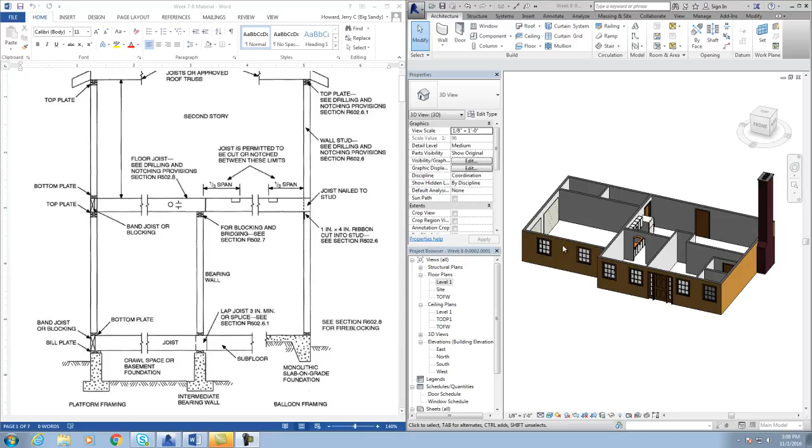Welcome back to this next lesson. As you can see on the right side of my screen, I have exactly what you have right now, and you've probably got a lot more. I don't have all the windows in mine, but I've basically got the doors, a few windows, and you should have yours completed. I've also got my kitchen set up - cabinets, appliances, refrigerator, all that good stuff is in there.

After I get my first floor set up, I'm going to start designing my foundation. That's always the first step as a designer in architecture - you always start out with your first floor. The reason being is that way you know exactly what needs to be supported to build your foundation.

So what I want to do first is tell you how we're going to build the foundation of this, and how we're going to construct it - what type of method are we going to use. There are a couple methods out there. We're going to use a platform frame construction on this.

And what that means is basically, right here's your platform - this is going to be your floor joist. It makes a platform, and on top of that is where you build your walls. This is going to be your stud walls, set exactly on top of that platform. The platform sits on the sill plate, which sits on the foundation wall, and then the footer is what supports that. So that's what we're going to use to build this one.

And if you look on your blackboard, it says that we want to build a foundation wall that's 32 inches. So we're going to take off and start doing that, and we're going to add levels to this.

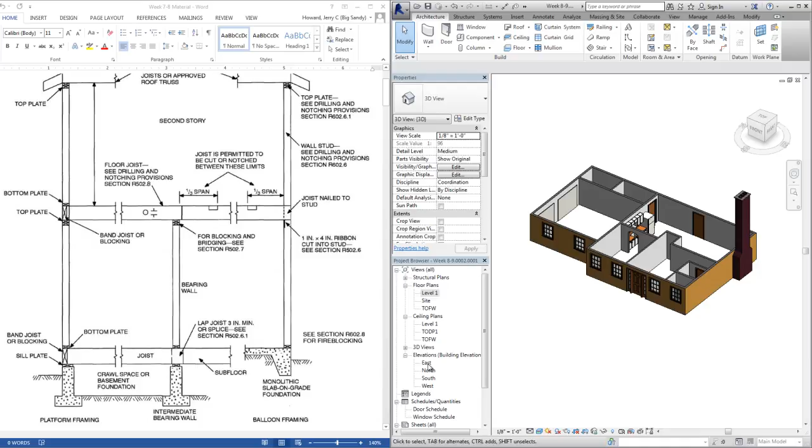To do so, I come down here in my project browser and I'm just going to go to my east elevation. Or let's go to the south elevation, we'll probably see it a little better.

I've already got a couple things up here - you see that? I'll pull these over so we'll have enough room to be able to see it a little easier. I've got my top of double plate 1, and your double plate is this right here, you see that? Top of double plate, that's that line right there. I've got it at 8 foot 1 1/2 inch.

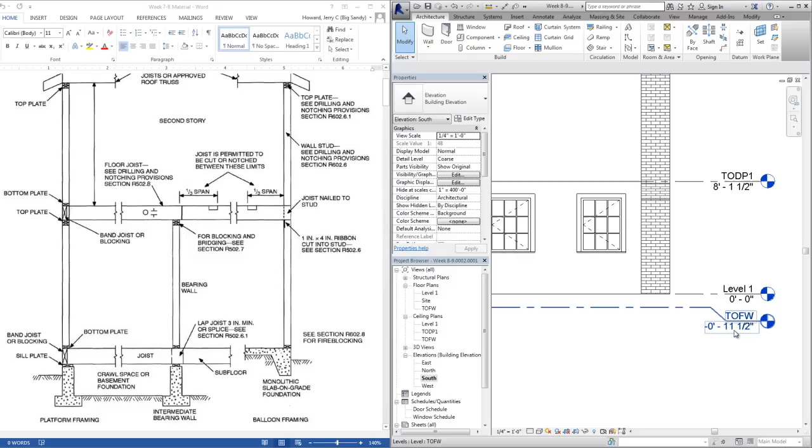Alright, level 1, this is the level I'm walking on in the house on the first floor, is at 0. And if you look here, my top of foundation wall is negative 11.5, so it's 11.5 down this way. The top of foundation wall - if you follow my cursor over here, you see this? Right underneath that sill plate is your top of foundation wall.

How I come up with 11.5 is because we want to use 2x10s on this floor for the floor joist. So if you scoot down through here - 2x10s, the nominal size says 2x10, but the actual size is 1.5 by 9 1/4. And this is the size that you draw to - you never draw a nominal size, you always draw what it actually is.

So 9 1/4, you can add that up, 9 1/4, and then we're going to put 3/4 inch tongue and groove plywood, or you can put AdvanTech on there, whichever way you want to do it. It's about 3/4 of an inch. So 9 1/4 plus 3/4 is 10 inches.

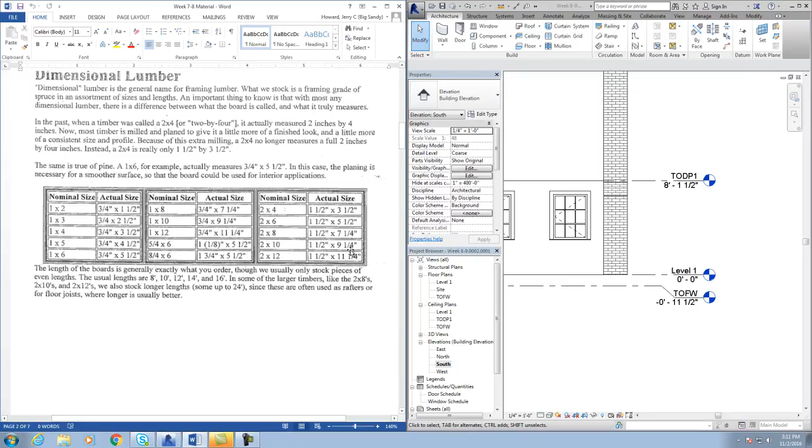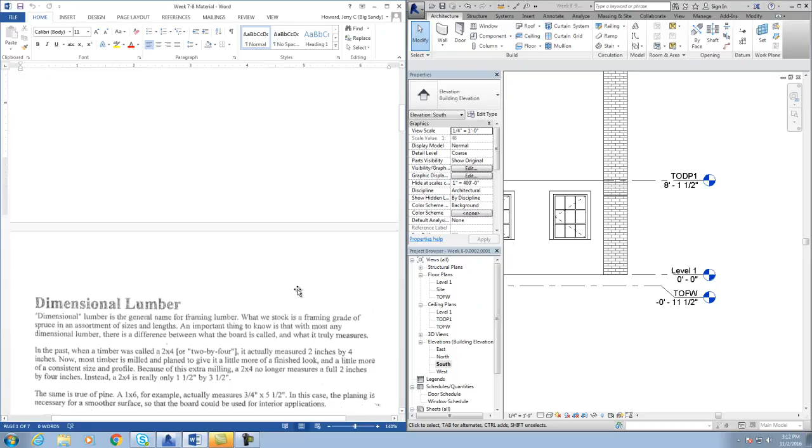And then don't forget one more thing - if right up here is your 0 mark, right across the top of this floor, this is 9 1/4, and then plus you've got to add in that 3/4 inch flooring, makes 10 inches to there. And then the sill plate is a 2x6. So a 2x6, if you come down through here, is 1.5 thick. So that's where you take 10 plus 1.5, makes 11.5, and you've got the top of your foundation wall.

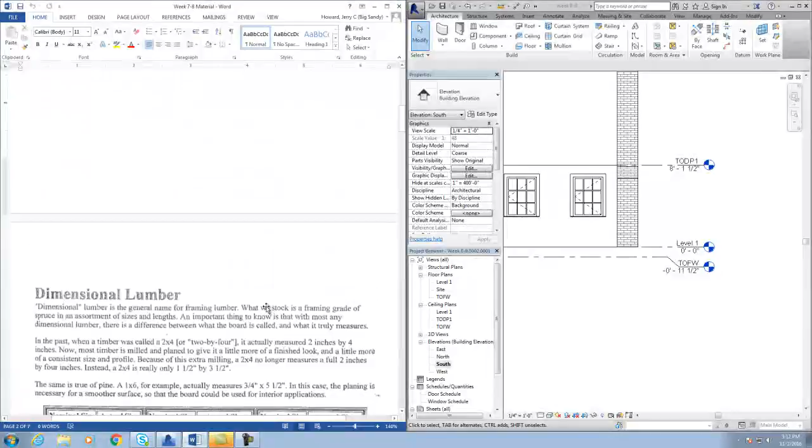Now you also saw that I had on our blackboard that we want to make the foundation wall - we want to make that foundation wall right here - 32 inches. This is how you do it. In architecture, over here is your datums, right here, level. I'm just going to roughly put me a line over here and click.

Escape to get out of the command. I'm going to double click there, and I'm going to call this one TOF, capitalize that, top of footer. Yes, I want everything to correspond with it.

And that's right here, it'd be at this level right here. That'd be my top of footer, this will be my bottom of footer. But before we get too carried away,

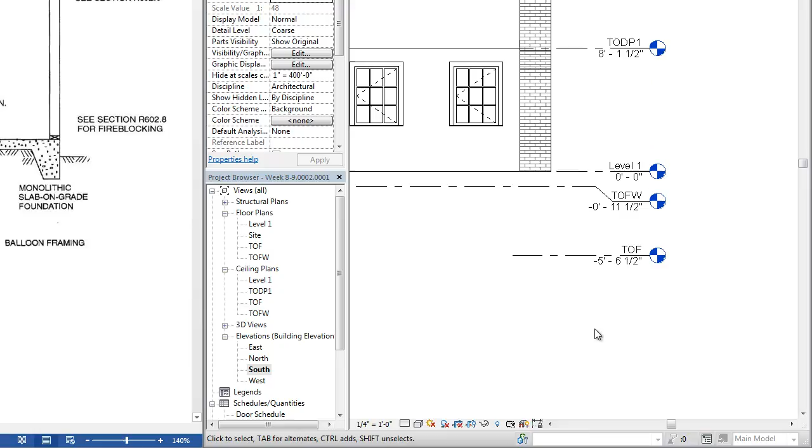I need to set this dimension. This is going to be 32 inches, and it puts it just like that.

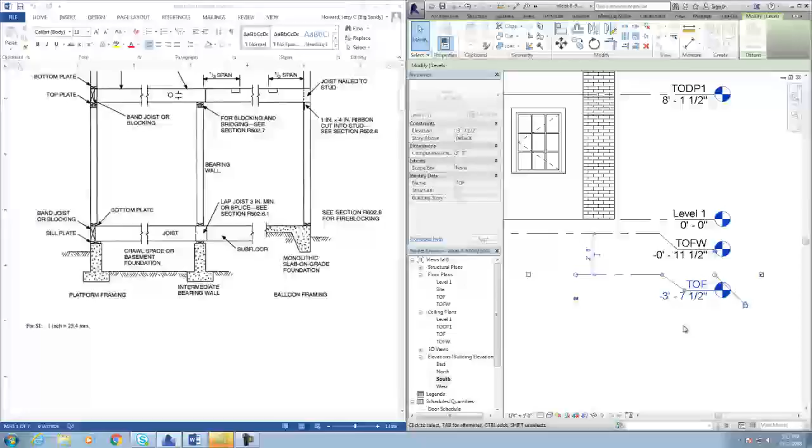Now, if you get crowded in here, and I've got this one set at 1/4 inch equals 1 foot, you can just click that and change it to whatever you want to. But if it gets too crowded, you can click on this and hit your squiggly line, and then you can pull, and you can kind of clean up a little bit, okay?

And then you can shoot that line on across there if you so choose to.

Catching that dimension. Click on it and you'll get a grip just like that one, and you can be able to pull that right on across.

I can already get it for that number. There it is. And then you can pull it on across.

Okay. The next thing I want to do is make a bottom of footer, but I really don't know what size my footer should be or anything of the sort. So I'm going to show you what is the minimum way to find out what your foundation wall should be, the thickness of your foundation wall, as well as the width and depth of your footer. And this is just a minimum method.

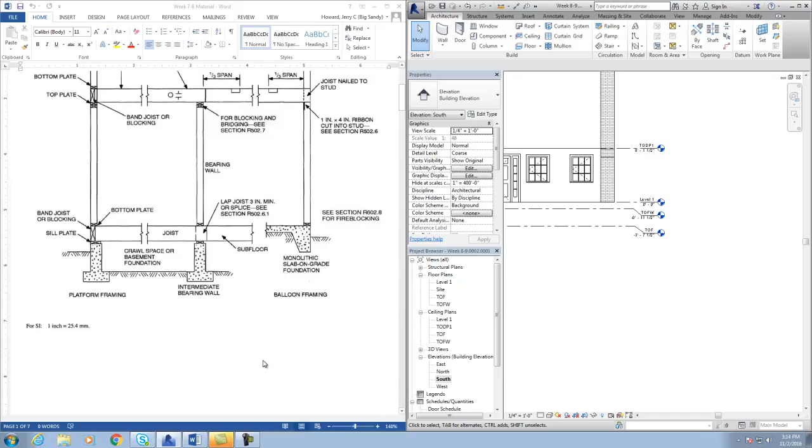And if we'll go over here to this side, I want to slide down here, and again, this is your foundation wall. We're going to find the width of it, the width of the footer, the T foundation, and then we're going to find the height of it. And I want to slide right down here, and there's a chart.

And here it is, and you've got 3 different categories. You got maximum wall height, you got maximum unbalanced backfill height, and then you got soil classifications, and you got 3 of those. Now, we're going to start out with

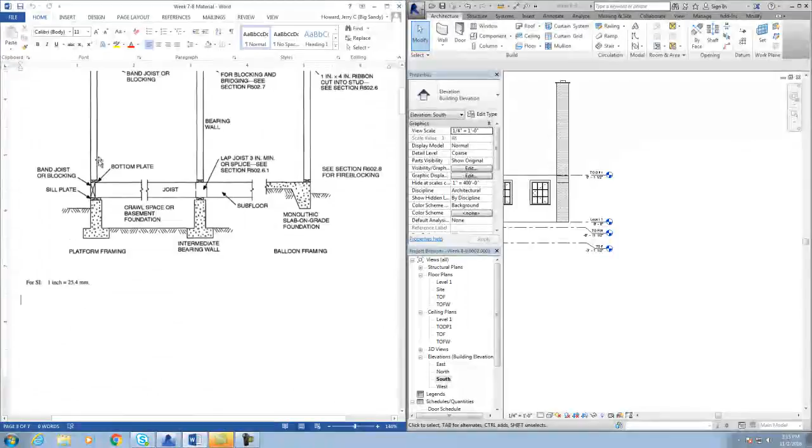maximum wall height. And this is just basically how tall this foundation wall is from the top of the footer up to the top of the foundation wall where it touches the sill plate. Okay?

The next thing you're going to look at is maximum unbalanced backfill height. Now, what that means is unbalanced. Well, if you look at this, you see how the earth, this right here is your grade line, and this is all earth over here.

So this footer was dug down to get below the freeze depth, the frost depth, and if you look right here, this is all dirt, and this is going to be crawl space and going to be opened. Okay? So they call that unbalanced when you've got dirt on this side of it and this side doesn't have any dirt. That's what they mean by unbalanced.

So let's say, for instance, this wall right here is 6 foot tall. We'll just throw that out there, and we know it don't look proportional, but let's say it's 6 foot tall, and we've got dirt unbalanced on 5 foot of it. Okay? Just for an example. So it's 6 foot tall, and you got 5 foot of dirt on that wall, unbalanced.

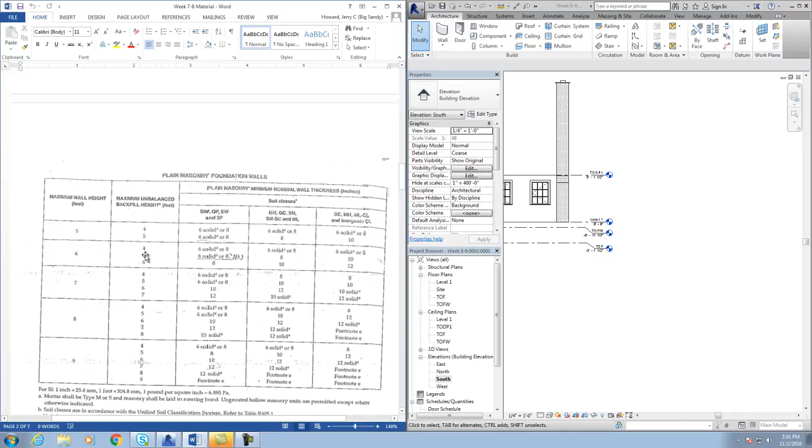So you slide down here, you find the wall was 6 foot, and you had a 5 foot unbalance of dirt on one side. Now you got to figure out, now remember that, now you got to figure out what kind of soil that

you have, and that would have to be taken to a civil engineering firm, and they would take and test your soil for you, and they would tell you exactly what kind of soil it was. And these different ones here, they're in 3 different categories or columns. We'll slide down here and I'll show you what they look like.

Here, this is how you do soil classifications. You got the first letter and a second letter. The first letter is like G for gravel, S for sand, M for silt, C for clay, O for organic. And then the second letter is P, W, H, and L. It's poorly graded, well graded, high plasticity, or low plasticity.

Now, this chart, what I'm showing you over here, I've got it attached in Blackboard for you, so you'll have that. But let's say, for instance,

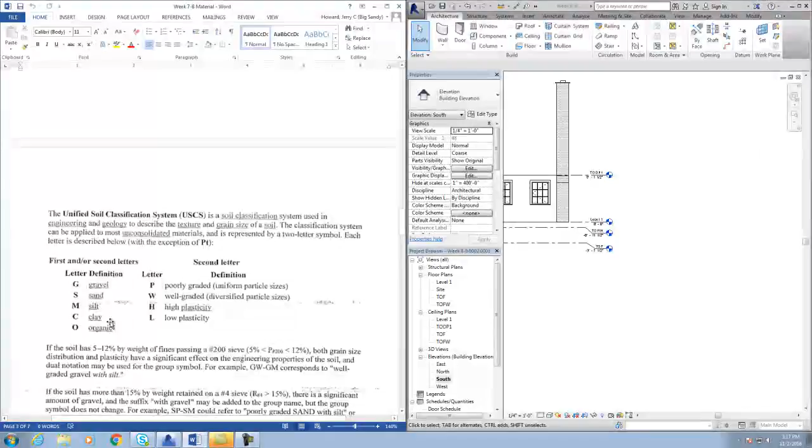I've got let's say an SW soil, okay, and we've got that 6 foot wall, 5 foot unbalanced. So in this column, we come down, and it's telling me that my foundation wall should be 6-inch solid concrete or an 8-inch CMU, which is a concrete masonry unit.

You can use either one. Now also, it's got a little tag on it, if you can see that - it's got a D on it, and there's a little drop-down footnote. It says here: solid grouted hollow units or solid masonry units. So you can either pour that with concrete solid 6-inch foundation wall, or you can take a 6-inch concrete masonry unit and pour it with grout, and it would be the same thing.

You can use that. So we decide, and another thing is, after you figure this out, say like this 8-inch, where you're going to use the 8-inch CMU is what I would use on this.

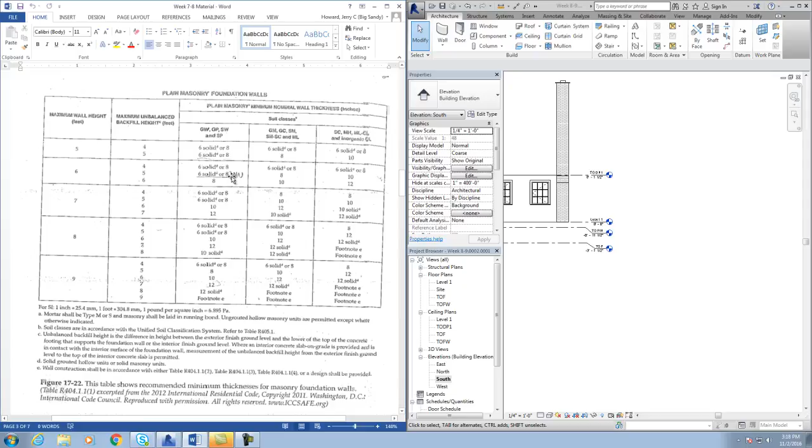When you look at the rule of thumb is, whenever you figure out what this is, like this is going to be 8 inches, you always go 2 times wider on your footer. So 8 times 2, this would have to be a minimum of 16 inches wide, and the thickness is whatever this thickness is. If this is 8 inches, this needs to be 8 inches.

That is just a minimum rule of thumb. It just varies depending on how much weight of the structure and also different conditions with the soil. They recommend in a lot of your textbooks that you can use that.

I don't recommend ever going under 10 inches on the thickness of your concrete, if it's a 1-story home. Now if it gets to a 2-story home or 1.5-story, I almost always recommend using a 12-inch thick concrete.

It doesn't cost you that much more, and you've got that solid foundation, which you will with this as well, but this is just the minimum that you can get by with. So if I was actually designing something for myself, whenever you're designing anything for anybody, always think about yourself and would this be all right with you? And I always like going a little bit thicker with the footer, because it makes a stronger foundation for you.

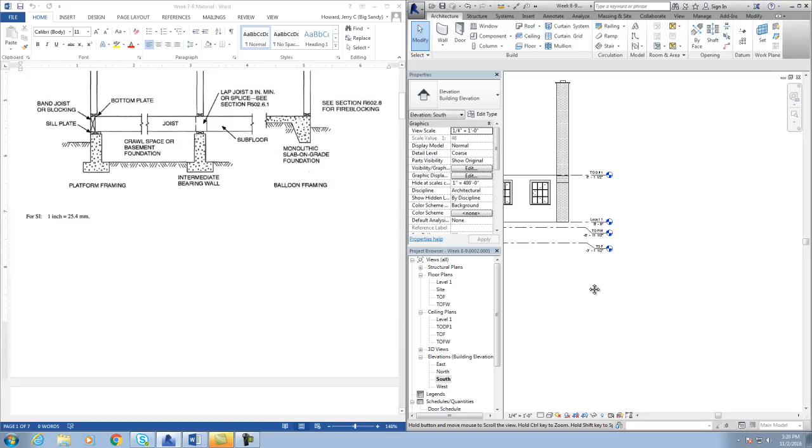So always design things the way that you would like it for yourself, and you'll be all right like that. But anyways, over here we get back to our drawing, and I want to put me another level. We could go 8 inches thick, but I'm going to go on this house because it's 2 stories - I'm going to go 1 foot thick on this. This is a 2-story house, so I'm going to go 1 foot thick, and I want to start me another line across.

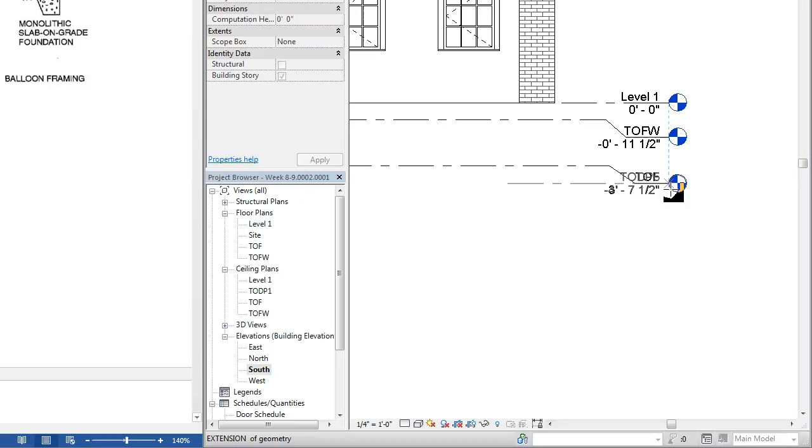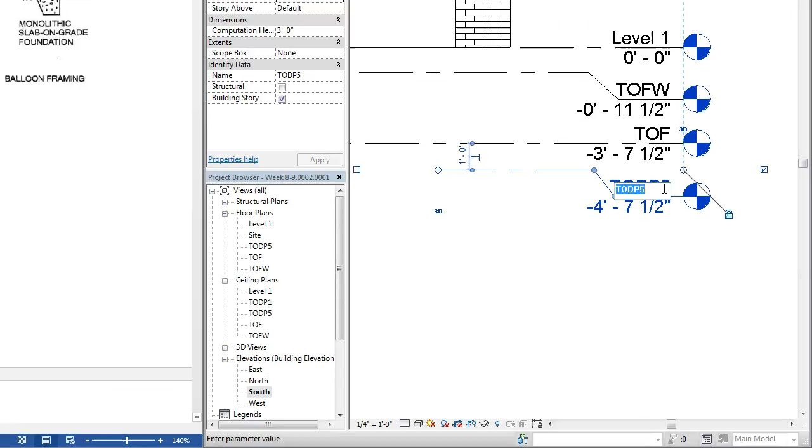And I'll set it for right there because it's going to mesh right in with this one. And I want to bring this one up, and then I'll bring this one over. Click on this, click that, click over, and this one here, double click it. This will be your bottom footer.

All right, yes. Now we got the top of double plate 1 already in there, and I'm going to go ahead and put second floor on there. I'm going to hit level. I want to come up 10 inches because I want that 2x10s, and I want 3/4 inch plywood, tongue and groove on that, so it would be 10 inches higher right there.

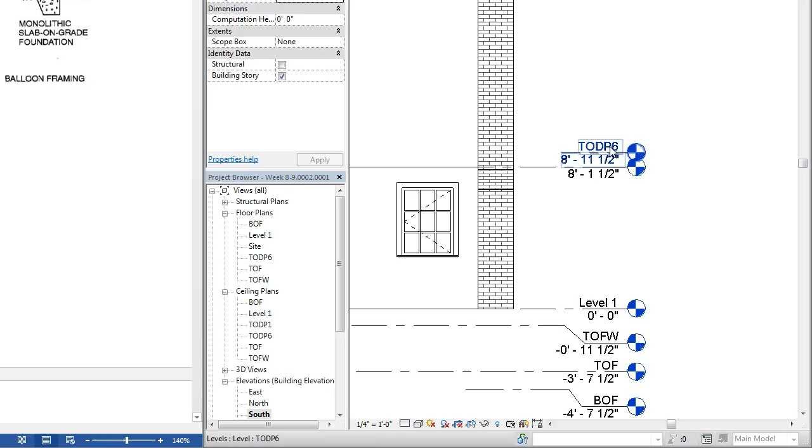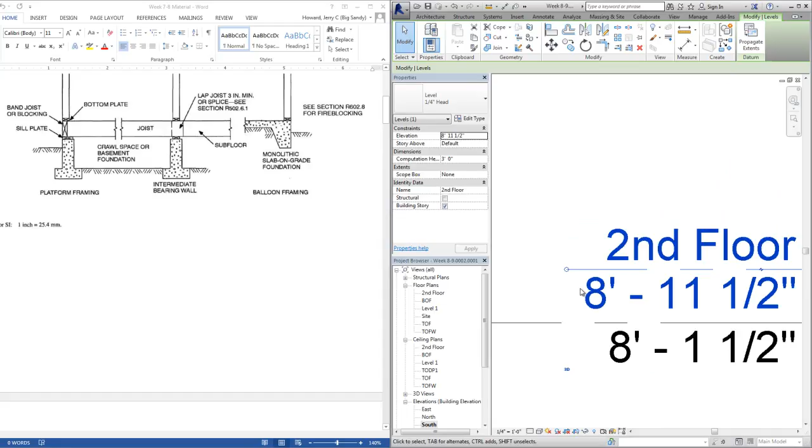We'll bring it over, double click there. This will be my second floor. Yes. Pull that across. If I can get a hold of it without bothering that other one - it's tough to do. Oh, I got it. I just had to zoom in there kind of tight to get a hold of it. Bring that across - there's your second floor.

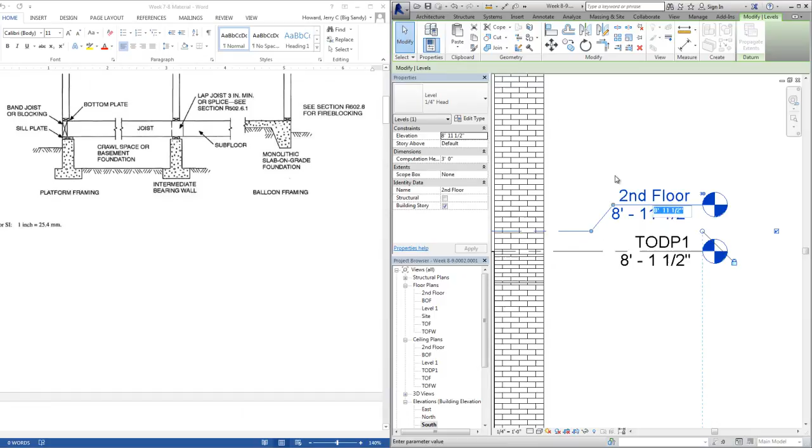And I want to take and do that and bring that up here a little way so it doesn't disturb the look of that other one. So just like that, we've got those levels in there. I can go ahead and put my ceiling level in, top of my second double plate, by hitting level.

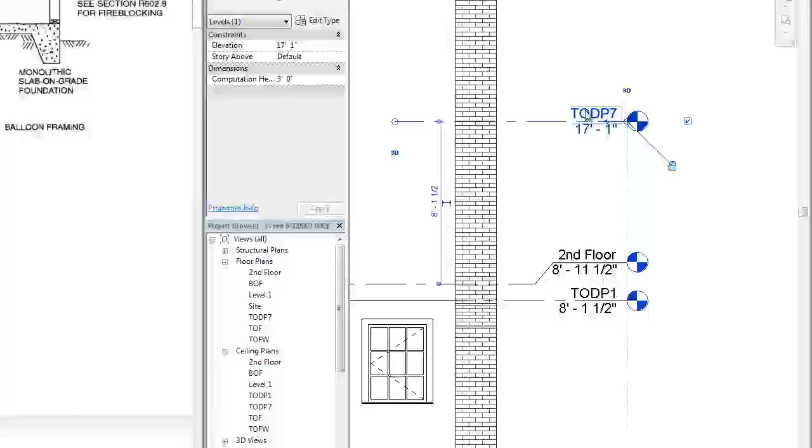And I want to go 8 foot 1 1/2. I just go up there, and then I want to click, bring that over. This would be 8 foot 1 space 1/2, enter, and this would be top of double plate 2. Yes. And I really don't know where the top of my roof will be or anything - we'll find that out later.

So these are all the levels that I need to get ready to start building my foundation. So just go to your next video and we will start our foundation.